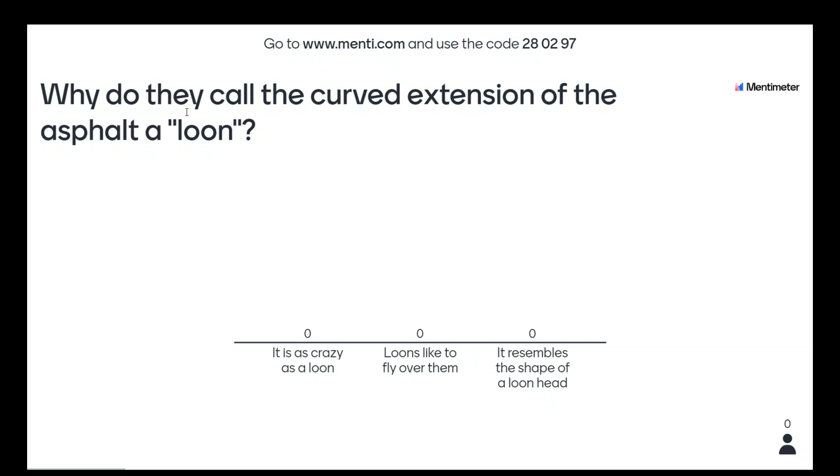Our next project-relevant test question, which you'll understand more later or if you've looked at the documentation we sent out, is why do they call the curved extension of the asphalt a loon? This is where we're dealing with R-cuts or some of the other U-turn engineered intersections.

Unanimously, people said it resembles the shape of a loon's head. I didn't catch anyone saying it's as crazy as a loon, or that loons like to fly over them. All right, I'll jump back to our PowerPoint.

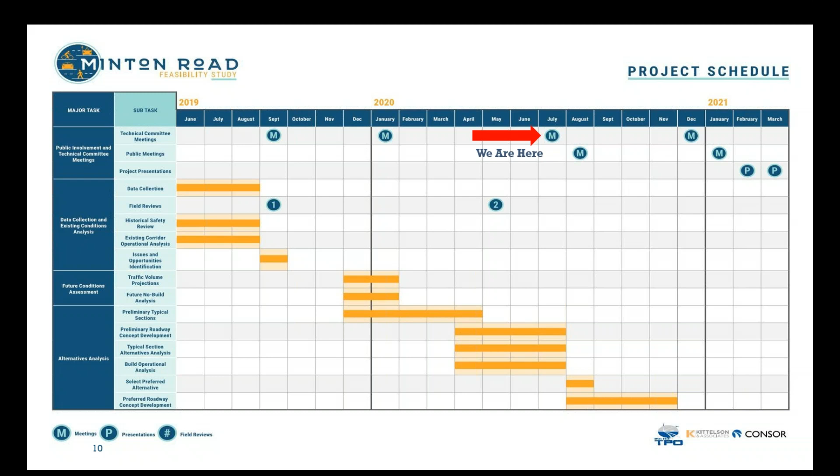So our project schedule - we are here, we're in July, it's our 3rd technical committee meeting. We have one more in December once we get through our preferred concept plan development. Like I mentioned before, we have a public meeting coming up in August, and that's why we wanted to meet with you all now, to make sure we're heading in the right direction before we show anything to the public in about a month.

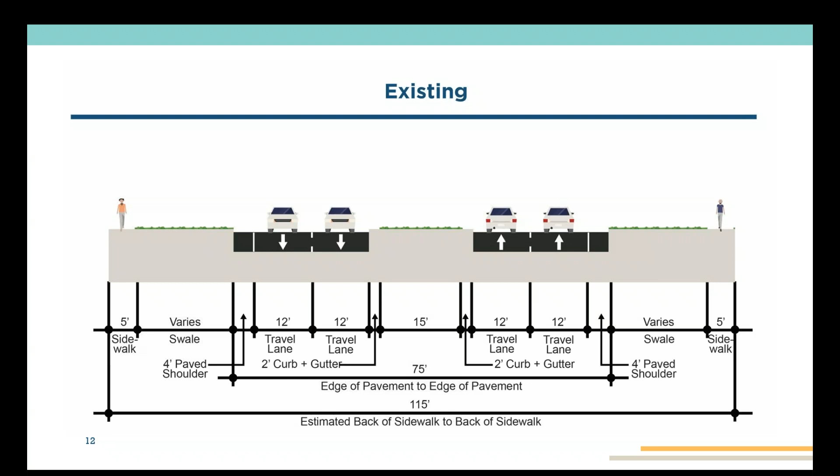So a quick refresher on the typical sections. As everyone knows, we have a 4-lane road with 4 12-foot lanes. We have about a 15 to 20 foot roughly median, and then we have those paved shoulders with the swales and the sidewalks outside of those swales.

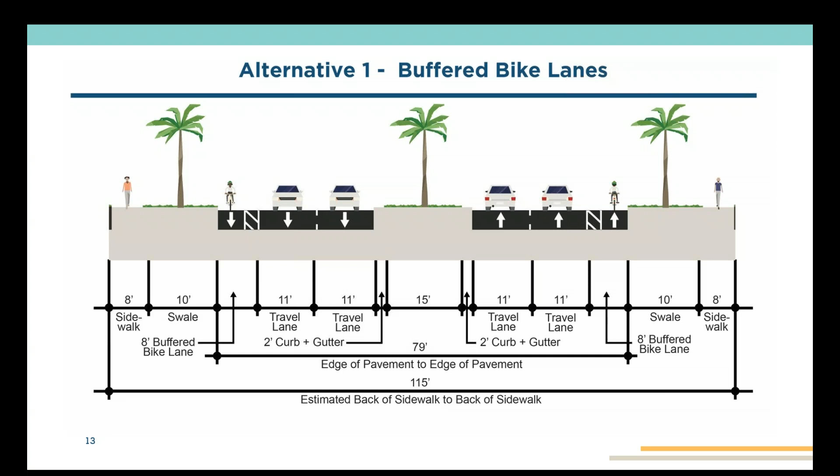So we looked at 4 different alternatives. The buffered bike lanes was our first alternative - it was relatively our least impactful. This involves adding a little bit more to that paved shoulder, adding in that buffered bike lane, and also going to the outside, adding in a little bit wider sidewalks as well.

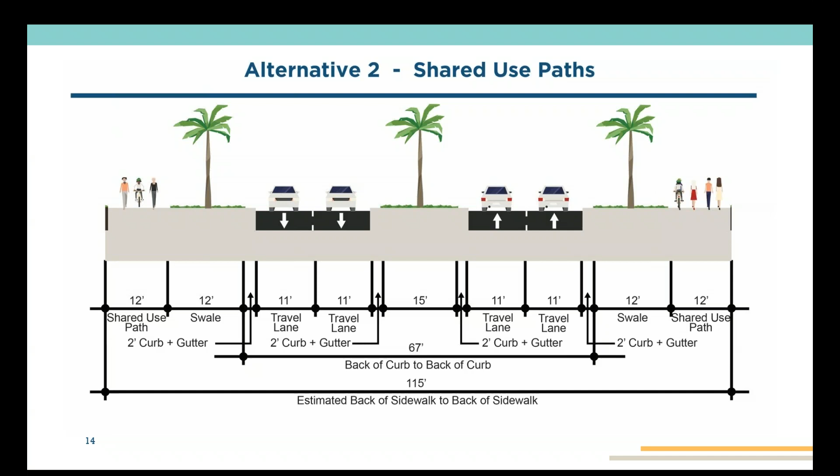Our second alternative, we were looking at shared use paths to the outside, pulling those bicycles off the roadway itself. We know that travel speeds are a little bit higher out there, so some people may not feel comfortable - we want to create a more shared environment outside of the roadway proper, 12 feet wide on both sides for pedestrians and bicyclists. We'd also be looking to reduce the travel lanes and go curb and gutter in this section as part of this alternative.

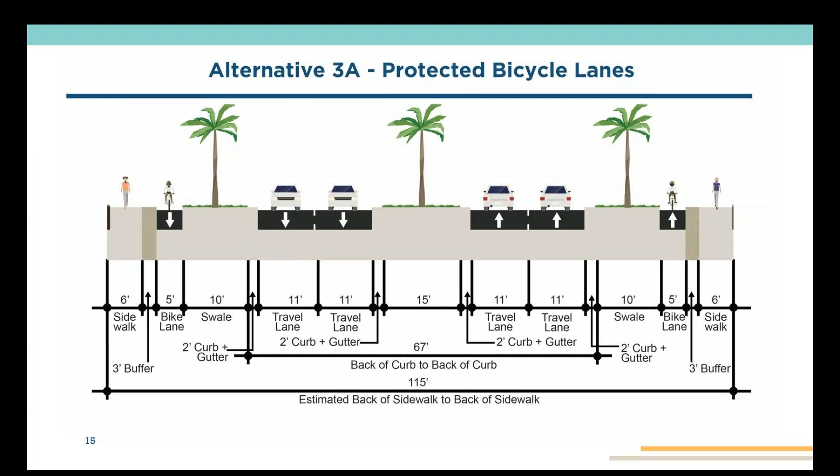So then the last 2 alternatives somewhat piggyback on each other - they're a similar type approach, 3A and 3B. For 3A, we're looking at protected bicycle lanes, and these would be one-way, one direction on each side of the road. If you're going north, you'd be on the right side of the road; south is on the left side of the road in the typical section. We have those 11-foot lanes, and on the outside, those protected bike lanes, which would be separated facilities - separated even from the sidewalk itself. So a little bit of a different concept than the shared use path.

Alternative 3B is a little bit of a different take on the protected bicycle lanes concept, called a cycle track. We showed this example as part of our last meeting, along with some examples of how these have been implemented. Essentially, it's a bi-directional cycle track or bicycle way on the side of the road.

We were looking to put it on either the right side or left side of the road, depending on where we're at along the corridor. We've given thought to putting the cycle track on the west side from Eber to Wingate, then switching to the east side from Wingate to Milwaukee. This hits the different future land uses we see along the corridor, targeting where we have schools, parks, and everything else. In addition to the cycle track, we would also have a wider sidewalk for pedestrians.

So those were the four options we presented. It seemed like we had some buy-in to take these to the public. The big takeaway is that nothing is set in stone. We haven't selected a preferred alternative yet—that won't occur until after our public meeting, and we'll be getting back with you all on that. The other part, and I was talking with David about this a couple weeks ago, is that we can switch some of the elements between these different concepts as well.

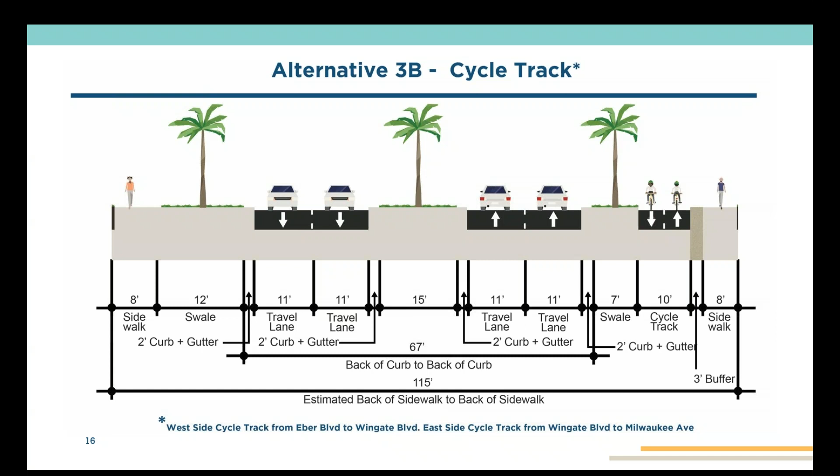Okay, and I think we sort of wanted to understand how that might affect future development with conflicts at driveways. Thank you, appreciate it.

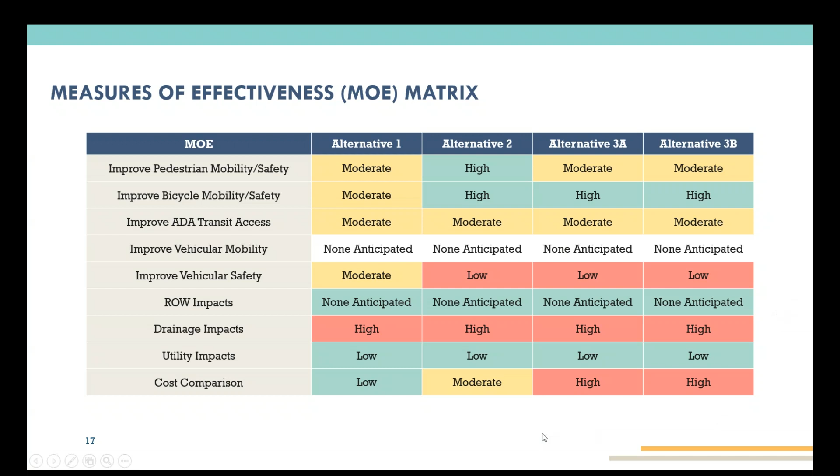Next we're going to get into Intersection Control Evaluation, or ICE, and we'll start with a high-level overview of the ICE process. ICE has multiple stages. What we presented last meeting in January at our technical committee meeting was the results of our Stage 1 analysis. At this point, we've completed Stage 2, and that's what we're going to talk about today.

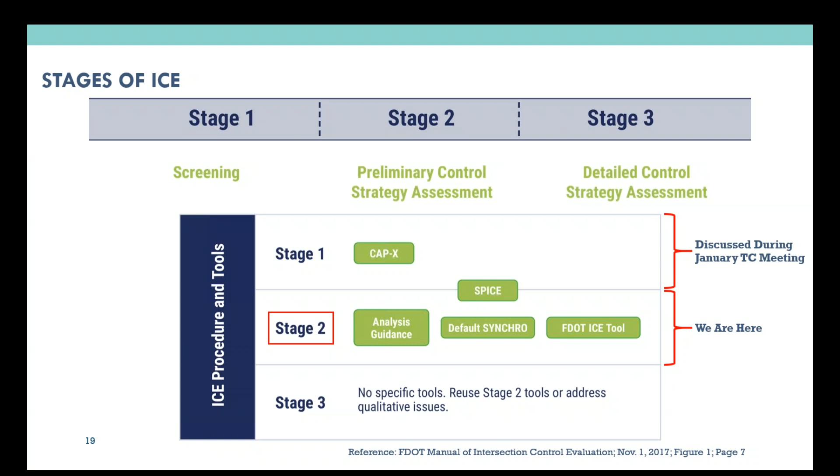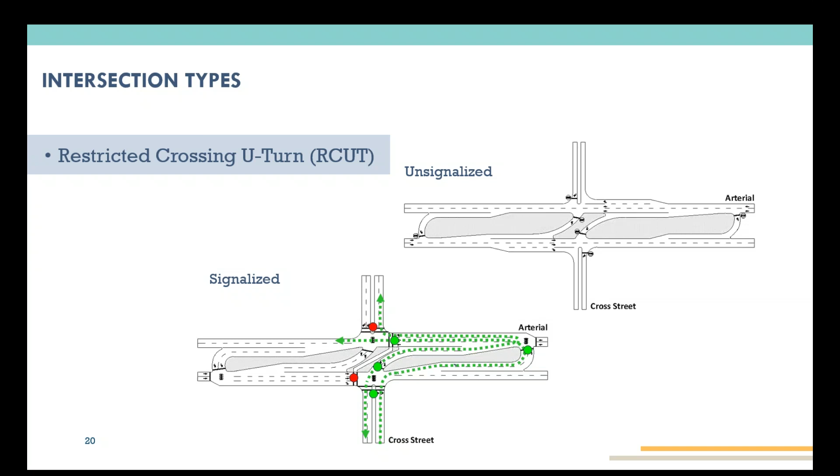First we'll look at some alternative intersection types that we evaluated, starting with the restricted crossing U-turn, or RCUT. The main difference between this intersection and a normal intersection is that through movements and left turn movements are not allowed from the minor streets. These are the rerouted movements: if you're making a left or a through, those vehicles reroute through the U-turns, which on Minton will be located north or south of the main intersection.

The next one we're looking at is the median U-turn. The main difference with this one is that left turns are prohibited on all 4 of the approaches at the main intersection, and again it utilizes U-turns to make those movements through the intersection. So if you're on the main line, and if you're on the side street, you can go through and right only.

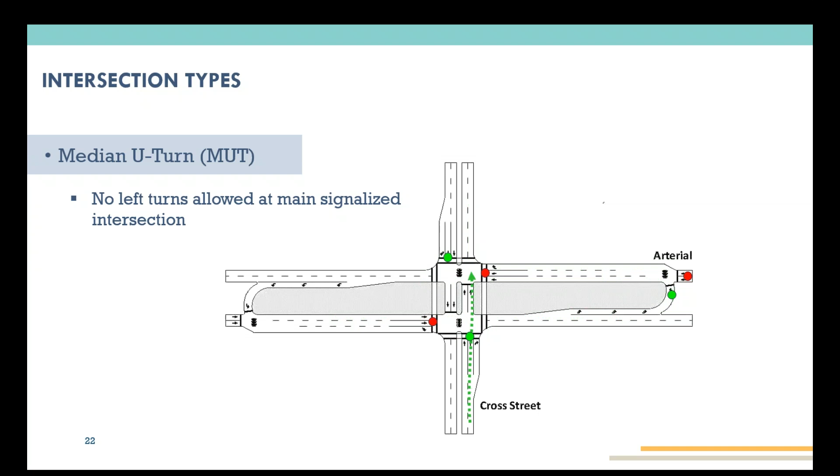A quick refresher of what we talked about last time and our results of Stage 1 ICE. After completing that analysis, the no-build for each intersection has moved on to Stage 2, as well as specific alternatives that were evaluated in Stage 2.

Starting at the southern end of the corridor at Hield Road, along with the no-build, the traffic signal alternative was evaluated, which provided an eastbound left with a shared through-right on the eastbound approach.

At Norfolk, we evaluated an RCUT, a median U-turn, and a partial median U-turn, as well as a traffic signal, and this traffic signal provided dual eastbound lefts with a shared through-right.

At Eber, we looked at two different traffic signal alternatives, one with dual westbound lefts and a shared through-right, and one with a westbound left and a shared left-through-right. Just a heads up, we will go over each of these individually in detail - this is just a higher-level overview of what we looked at.

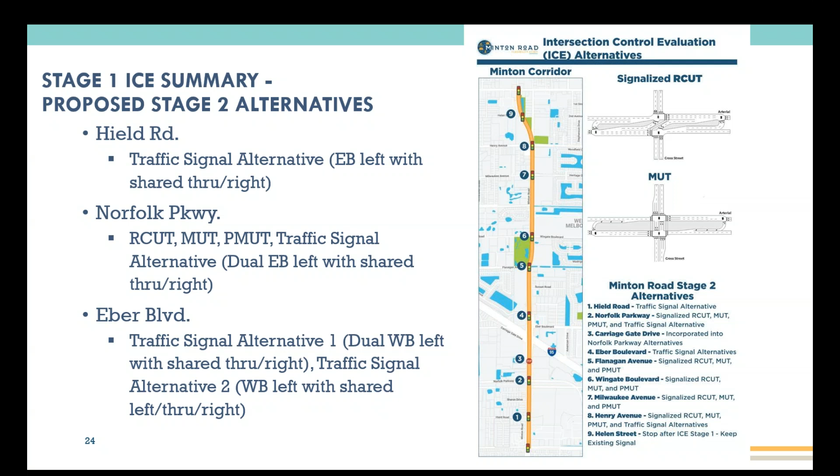At Flanagan Avenue, Wingate Boulevard, and Milwaukee Avenue, we looked at the RCUT, the MUT, and the PMUT at all three of those locations. At Henry Avenue, we looked at the RCUT, the MUT, and the PMUT, as well as two traffic signal alternatives.

One traffic signal alternative with dual westbound left turn lanes with a through and a right, and one with a westbound left and a shared left-through-right.

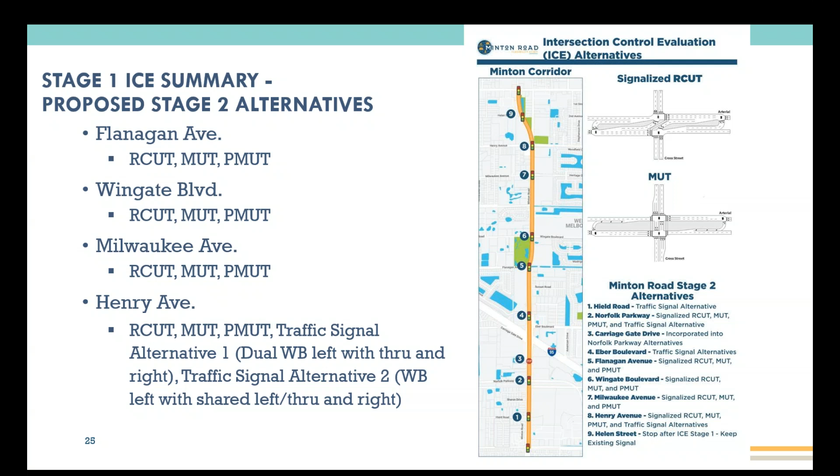Next, we're going to go over a high-level overview of the methodology - what we did in Stage 2. We began by completing an operations analysis using Synchro software. Next, we did a safety analysis using the FDOT SPICE tool. Following that, we developed concepts for our alternatives.

For this, we selected Minton Road and Milwaukee Avenue as a typical location along the corridor, and developed a concept for an RCUT, a MUT, and a PMUT at that location. That concept would then be applied typically at the other locations where we evaluated those alternatives. We also developed a concept for each of the traffic signals that were evaluated.

Following the concept development, we took those concepts and based off of those developed cost estimates. A typical cost estimate was developed for the RCUT, the MUT, and the PMUT, as well as a cost estimate developed for each of the traffic signal alternatives.

The last step was to use the FDOT ICE tool, which basically takes into account all of the analysis that was done - the operations analysis, the safety analysis, the cost estimates - all of that data goes into the ICE tool, and the output is a benefit cost analysis as well as a net present value. These are the numbers we use to compare alternatives to make decisions.

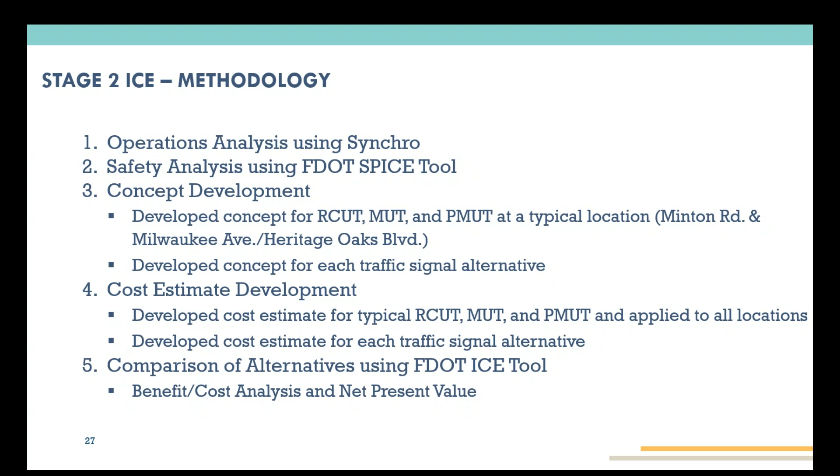So getting into the concepts and what the typical concepts look like. Hopefully each of you guys have these. We're going to go through these starting at figure 1, but if you want to look at it on paper or on your computer screen, that might be easier.

We'll start out with the signalized RCUT. Basically these alternatives allow for signalized pedestrian crossings at the U-turn locations. This is great for locations where you want more pedestrian crossings but may not be able to signalize a certain intersection—this allows you to signalize the U-turn, providing additional pedestrian crossings. As discussed earlier, you can see the loon provided for the southbound U-turn movement.

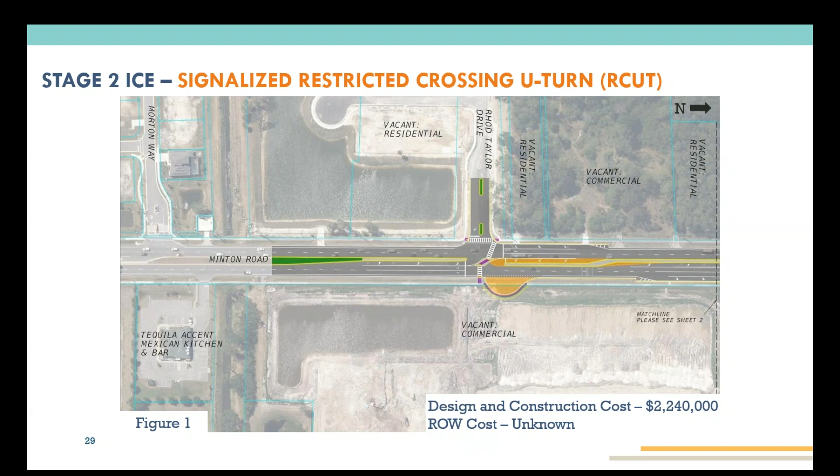Looking at the main intersection for the RCUT, the difference from the other alternatives is that from the side streets, only right turn movements are allowed. Throughs and lefts from the side streets are restricted, and those movements would make a right turn and then U-turn back. There's also a U-turn location on the northern end, with signalized pedestrian crossings. The RCUT came out with a high-level cost estimate of around 2.24 million for design and construction. At this point we don't have costs for right-of-way, as we haven't determined right-of-way costs per square foot yet, but we could look into that in more detail if we choose to go with these.

Next we'll look at the partial median U-turn. Looking at the northern end, this is exactly the same—it provides the signalized pedestrian crossings and has the U-turn with the loon. At the main intersection, the difference here is that the side streets are allowed to make left, through, and right turns, but on the mainline, the north-southbound approach left turns are restricted. The partial median U-turn came out to around 2.23 million for design and construction costs, so right in the same range.

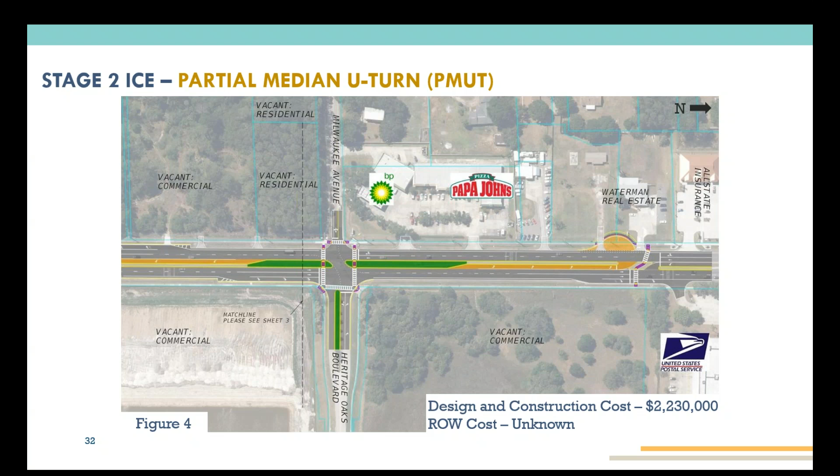The last one is the median U-turn. Again, the northern end is exactly the same, with pedestrian crossings and the U-turn. At the main intersection, this time we're restricting left turns on all four approaches. Throughs and rights are allowed, and you can circle back at the U-turn with left turns being restricted. This also came out to around 2.24 million for design and construction costs, as a rough estimate.

Digging into just the U-turns a little closer, these were developed based on a CAD tool, and we took design vehicles for this location—a box truck and a school bus. The box truck is your typical FedEx, UPS delivery type truck, a single unit 40-foot truck. Our loons were developed based on the right-of-way needed for those vehicles to make the U-turn. In this case, I think the box truck was the controlling vehicle, and that's what the required right-of-way is developed based on in these concepts. As discussed earlier, right-of-way may be needed for these locations where these alternatives are applicable.

And with that, do we have a Mentimeter question for this one?

I'm thinking maybe Sarah, before we jump into Menti, why don't we just go back and open up the floor—any questions about the concepts or kind of what approach we took? Because this is really the foundation for what I'm going to be talking about for the next probably 30 slides.

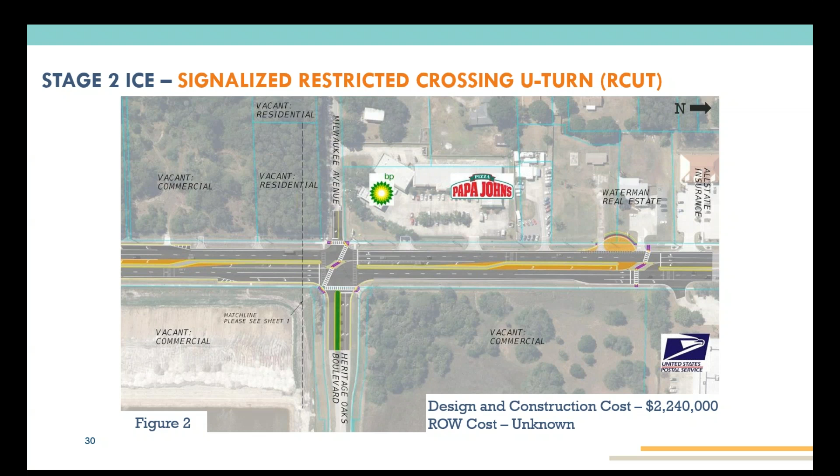Hey, I have a question for you all, this is Christy by the way. I just wanted to make sure I understood, like in this example near the Papa John's and Waterman real estate, that vehicles, when they go into that pocket of that loon, it's not that they're staged there waiting to flow into traffic. That's a complete movement they can do without having to stop, am I correct? Yes, that is correct.

Well, I just wanted to make sure, because I've never seen loons in action. I know how sometimes people pull over the side of the road - is there a chance that could become a broken down car situation where you couldn't do that full movement?

I think that just turns into normal emergency operations. If you have a car break down in the outside travel lane, what we're doing for our typical sections isn't going to prevent that - it's still going to block the outside travel lane. So if a car is disabled and somehow makes it into this loon area, whether you had the loon area or not, that disabled vehicle is still going to be in that situation. Yes, it can happen like you're saying, but I think the odds of that are pretty low, just in general.

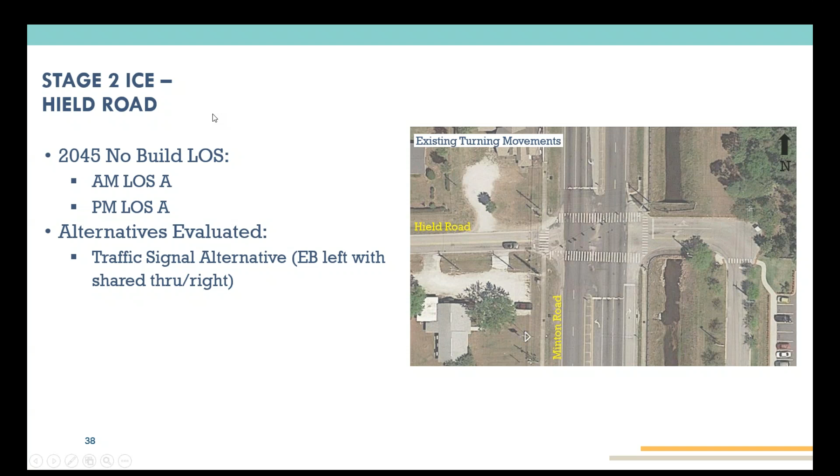So Hield Road, we looked at our initial no build. This intersection is in pretty good shape, level service A in the AM, level service A in the PM. We did get a request from the county after our meeting in January to go back and look at a traffic signal alternative where we looked at adding an eastbound left turn lane. And then it would have an additional shared through right as the right turn lane. So here's what that would look like.

As you'll see, north is up. This is Hield Road, the west leg. We're adding that eastbound left turn lane, then you have that shared through right. As you'll see, we're well within the right of way from what we could tell. You have really minimal impacts overall. You're adding a little bit of pavement to both sides of the road. It's all open drainage today, so it's all just kind of that rural typical section. So we would pretty much just keep that as is. We wouldn't be introducing curb and gutter, wouldn't be doing anything to really change the drainage characteristics of the roadway besides adding that 10 to 12 feet of pavement total, not on both sides, 10 to 12 feet total to add in the extra pavement for that left turn lane. That's all in the existing right of way.

Yes, that is correct, from what we can tell it's all in the existing right of way. And what you'll, I think we talked about this last time, but just to be clear, the property at the northwest corner is actually owned by Brevard County. So if there needed to be some encroachment to the north, it's already county-owned property that would not be an issue there.

All right, awesome. And so overall design and construction, this is really a relatively low cost project. We're looking around $40,000. If you're following along in the packet, this is figure 7. You'll see that on each slide we have in the lower left-hand corner the figure number as well, so that y'all can keep track with us.

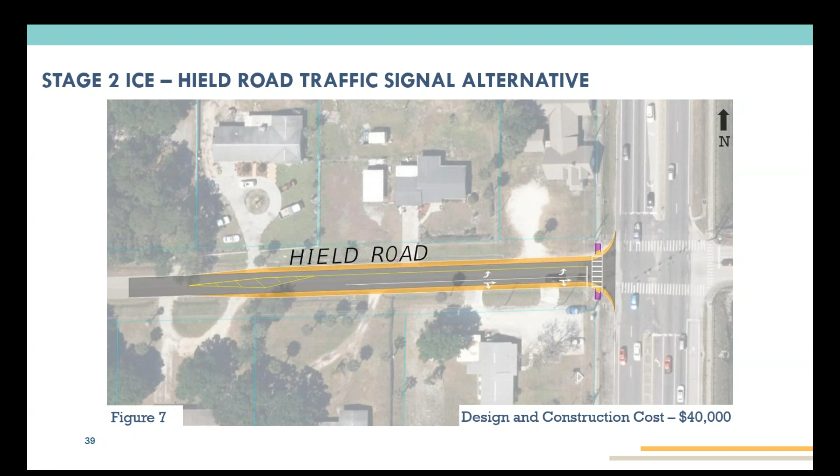All right, so then a very quick summary in kind of the more technical side of things. When we do this ICE analysis, we want to make sure that we're comparing back to our no build. We're calculating a net present value, and then we're calculating benefit cost ratios for a couple different metrics. So what we do is we start off with our level of service. We're saying, okay, we're level service A and B, we're looking pretty good. And the difference here, even though we go to level service B for the traffic signal alternative, that's like 10.1 seconds of delay versus the no build, which is like 9.5 seconds of delay. So it's like right on the threshold between A and B, it's not like you're adding 30 seconds of delay for that alternative. So that's a little bit misleading on that front.

But from a safety perspective, the traffic signal alternative, you're adding that left turn in, you're adding another left turn phase, so you're protecting those left turn lanes for a certain amount of their movements. You get a benefit on the safety there. Like I said, design and construction costs, obviously for the no build it's 0, but we're 40 grand for the traffic signal alternative. Then we move into the outputs of the ICE analysis. The ICE tool that we use, it's an FDOT tool, it runs a program or equation metric thing in the background, and it spits out a bunch of numbers. So one of those numbers is what we call a net present value.

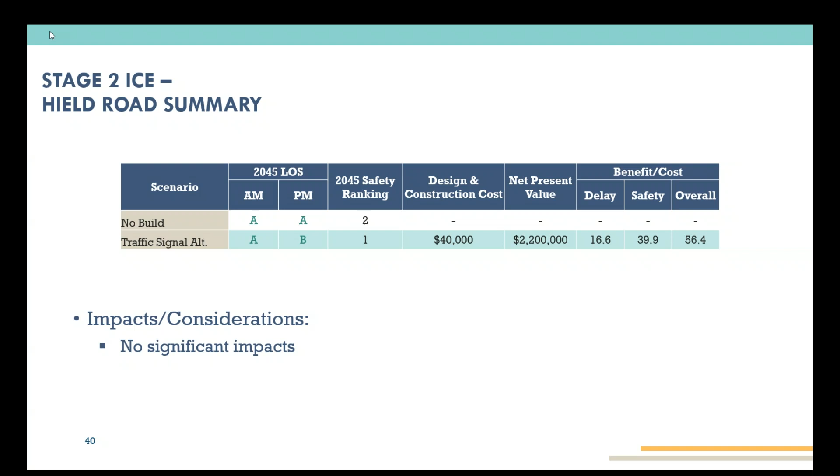All right, so any other thoughts before we go to the Mentimeter poll?

I do have Heald misspelled on this, I apologize. But basically, what should move forward to the public workshop? Actually, I should have included both on here. Do you want to present the traffic signal alternative, or not? So imagine that including the traffic signal alternative means both the no-build and the traffic signal alternative. Do you want to move the traffic signal alternative forward to the public meeting?

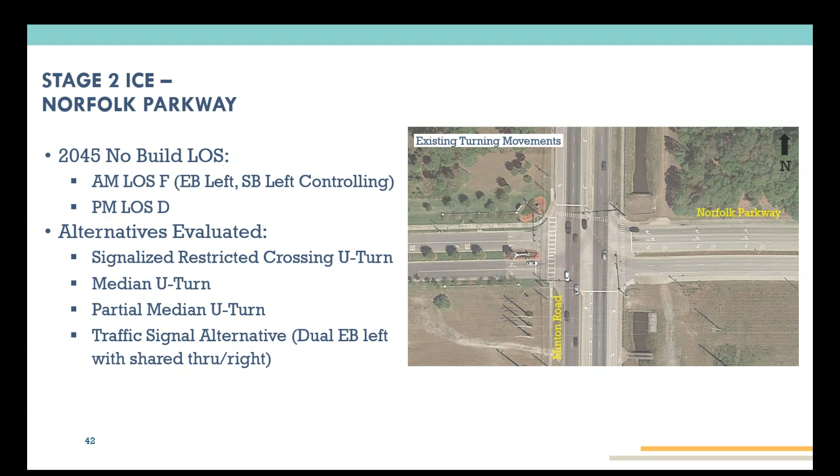So the alternatives we looked at were the R-cut, the median U-turn, the partial median U-turn - we ran all those through our ICE tool. We also looked at a traffic signal alternative, which was dual eastbound lefts with a shared through-right. I will show what that looks like here.

So we wanted folks to really approach this intersection like they would a typical intersection - you approach it in the through lanes, and then the left turn lanes flare out, and you can get into those left turn lanes.

We like that, and I think we talked about this last time, but we moved further. We actually have a signed agreement with a civil engineer to get us the 3 outbound lanes configured just like you have.

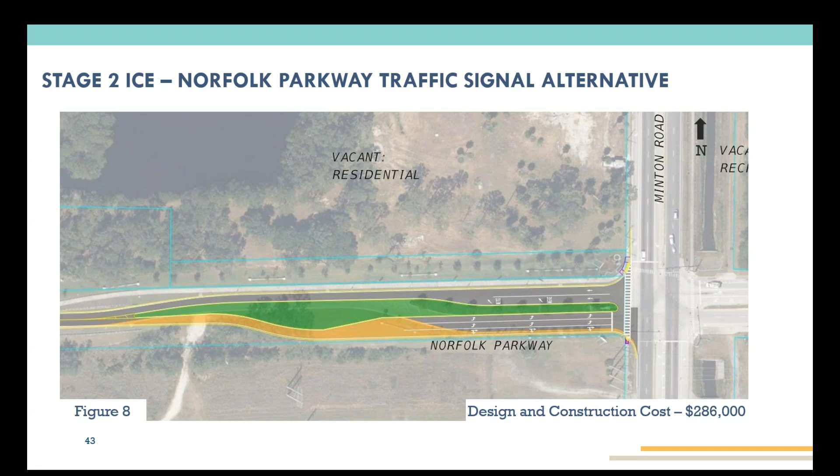Right, okay, all right, awesome. Well, so Scott, to further put your mind at ease, the traffic signal alternative was hands down the best alternative that came out of our ICE analysis. When you're looking at overall construction cost, like Ryan mentioned, we didn't lay out the R-cut, the MUT, and the P-MUT at every intersection. We just used that typical concept to come up with a construction cost.

And so, when we ran those numbers, the other ones just don't quite stack up because of that turning volume that you have coming out of Norfolk.

So, I think with that, one thing we're going to have to think about with this intersection that's kind of an accessory is what do we do at Carriage Gate? Something we discussed in one of our internal meetings was, do you make Carriage Gate a directional, where you make it left in, so you can go northbound and turn left into Carriage Gate, but then Carriage Gate coming out would be a right out only, so they wouldn't be able to make the left across Minton anymore.

Yeah, you're really going to have to talk to the county about that. It affects more of their citizenry. I think the only thing that's in West Melbourne city limits is the church, and that's primarily a Sunday non-peak hour activity, so I don't know that West Melbourne would have a view on that, but the county definitely would.

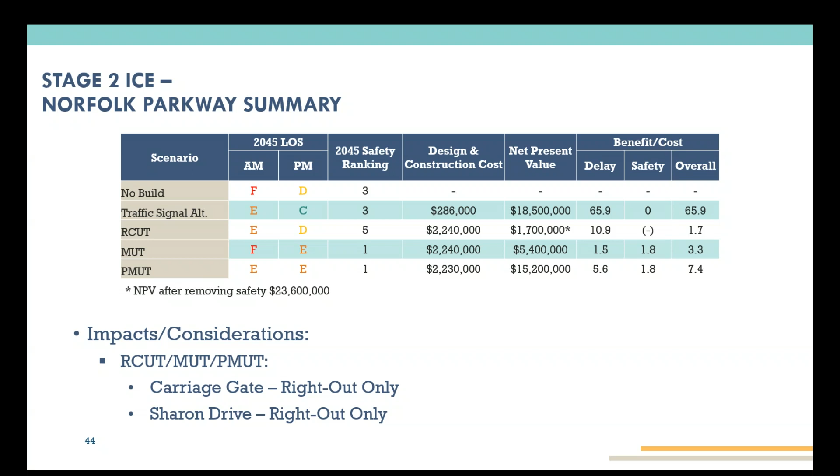Hey, Sarah, did you? Yeah, there we go. All right, cool.

All right, awesome, so it looks like we're all good. So we're going to cut the R-cut, the P-MUT, and the MUT out and just focus on the no-build and the traffic signal alternative for what we're going to present at the public meeting. What we like so far, you're making this easy.

All right, Sarah, do we want to switch back? Perfect.

All right, so moving up across the bridge to Burdock and Eber. So our no-build here, in the morning we were actually pretty good, but in the PM this is where we were having some issues with the westbound lefts coming out. So really what we wanted to do was target that approach and figure out what we could do to make that better. We may or may not have talked about this at our last meeting, but we didn't look at an R-cut, a P-MUT, or a MUT at this intersection just because of the close proximity to the bridge.

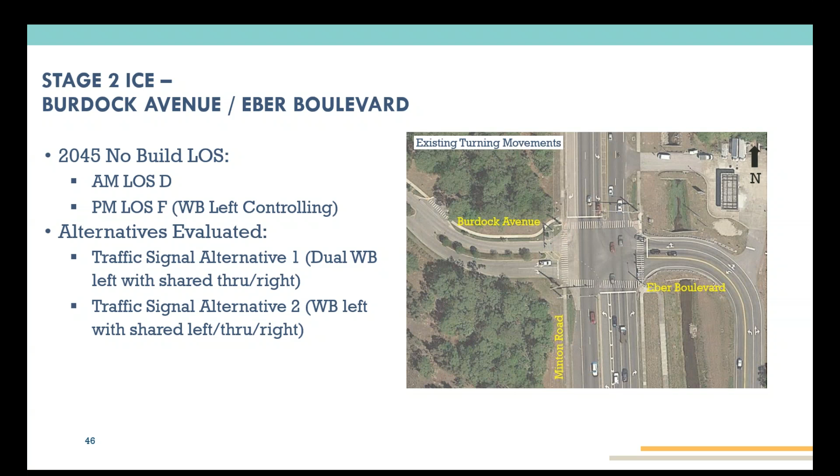So we didn't have enough space to provide that U-turn location going to the south without making folks cross the bridge, and we didn't want to have to make people do that. So we just stuck with the traditional intersection alternatives, of which we had two. The first was dual westbound lefts with a shared through-right, which is just adding another left turn lane approaching the intersection. The second alternative, which we do not have a concept for, is just changing around the striping that's out there today. You'd still have the two approach lanes and the exclusive westbound left, but the outside lane would become a shared left-through-right. I'll talk about some of the issues we had with that approach and concept.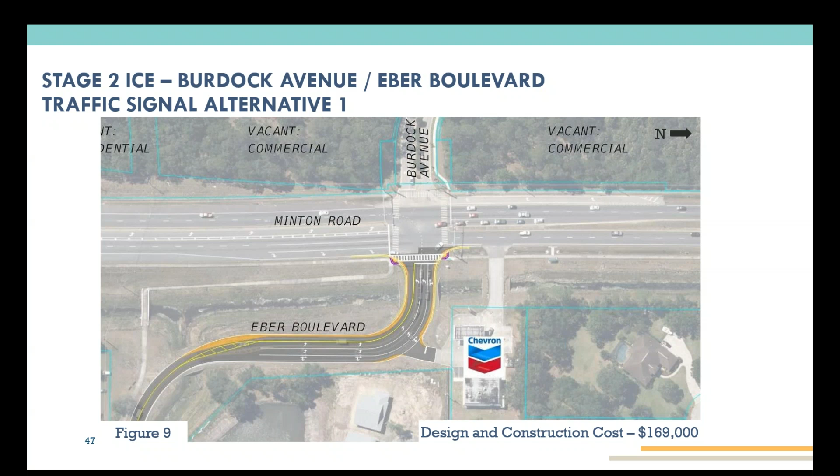Right, okay, yeah, we'll follow up with them on that.

So moving into the analysis, as you'll see, that first traffic signal alternative, which we just talked about, was the better alternative of the two. So benefit cost is pretty high, present value is great, design construction costs relatively low.

The issue with why this second alternative didn't work is when you go exclusive left and then have the shared left through right, you have to split phase the signal, and right now they're running together. So the east and west legs are running together, it's fully permissive, so you can make the lefts, do the throughs, do the rights. You just have to yield to folks.

When you do traffic signal alternative number one, you do go protected lefts for those dual lefts, but then you're still allowing your permissive through movements, and then you still have the permissive left from the west side of the road from Burdock. That still goes all at the same time. So you're limiting the amount of time that Minton has to physically stop and wait for that minor street.

When you go to the second traffic signal alternative, that all just pretty much gets shot because you're having to do now two different phases for those east and west legs. It really kind of blows things up, and I don't think the county's gonna want that, not speaking for them, but knowing their history. So it's definitely a lower cost improvement, but doesn't quite get you what you need, I don't think.

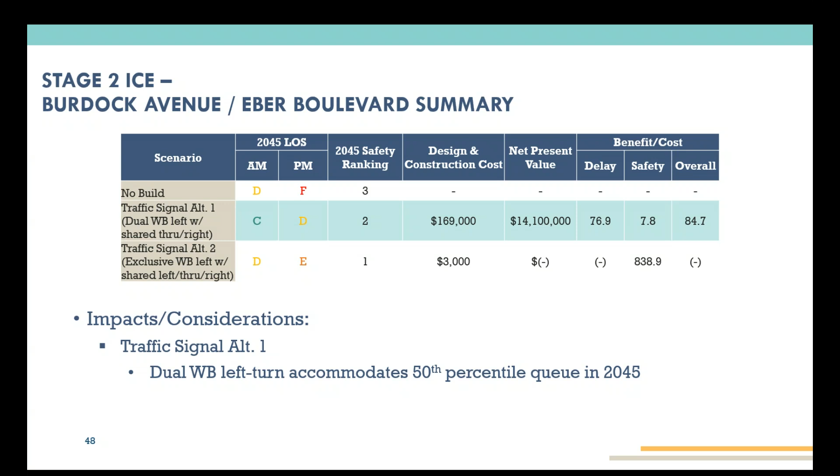Oh, so we both hit the space key. Yep.

So with Eber, are we comfortable only presenting the no build and traffic signal alternative 1, so cutting that 2 at the public workshop?

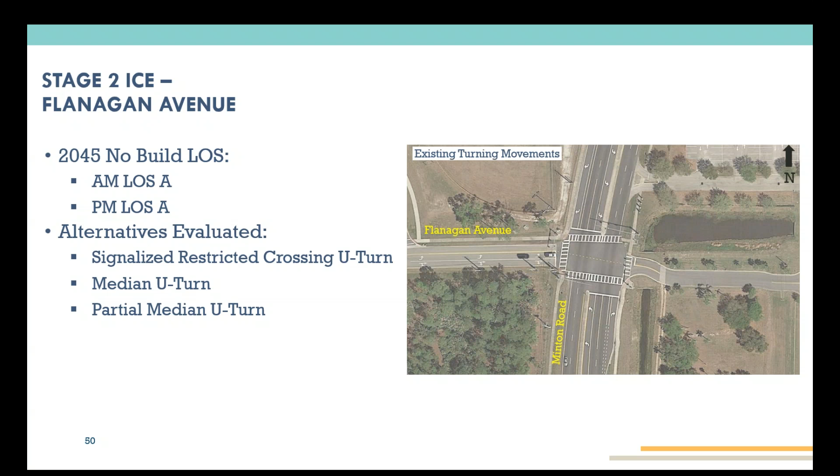And let me do this. What you'll see is that everything comes out negative. So when you're going in and forcing the limited number of vehicles that we have coming up to this intersection on the minor street, we're forcing them to turn right, increase delay, driving along Minton, going down, waiting for the U-turn, and then driving all the way back.

We see that these just aren't really that feasible of an alternative at this location, just because of the low volumes that we have. And so overall, our opinion, we think moving forward with a no build at this location would be the best option.

You know, we don't want to throw an alternative out there and present a bunch of stuff that probably isn't going to get built because it has a high price tag and it doesn't meet the needs of the project. And then also, we look back at the historical crashes as well to see if there was a safety issue, and overall there really wasn't a safety issue.

Sorry, my computer is deciding to freak out and try to install everything all at one time. That's nice.

So overall, it's a relatively low number of crashes, so it wasn't really a high emphasis intersection for us. Anything that we do typical section wise would impact this location from a ped bike standpoint. So we would go back, upgrade the ped bike features, make sure that it all ties together on that front. That's something to consider outside of the intersection analysis proper, is that there would be improvements as a part of the typical section alternative.

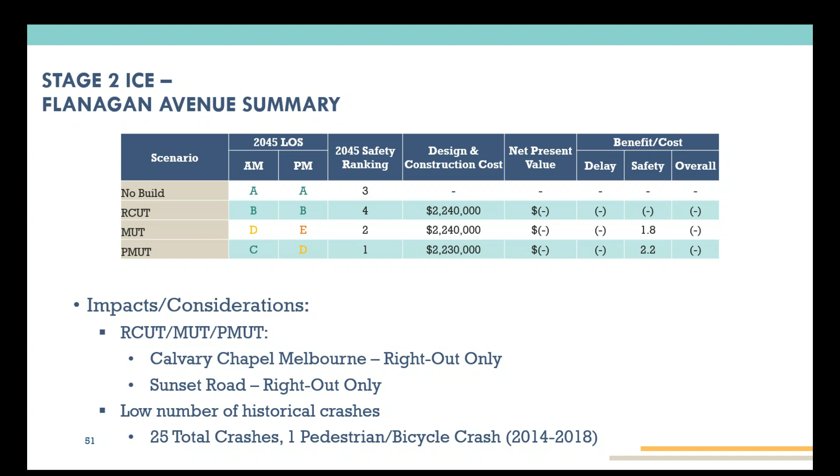All right. Goes back to my motto of if it ain't broke, don't fix it, right? Or I guess that's a lot of people's motto. It's not my motto, but.

All right, so are we comfortable with only presenting the no build at the public workshop? So basically cutting everything, all the analysis showed that really that's where we should go, and just keeping it simple.

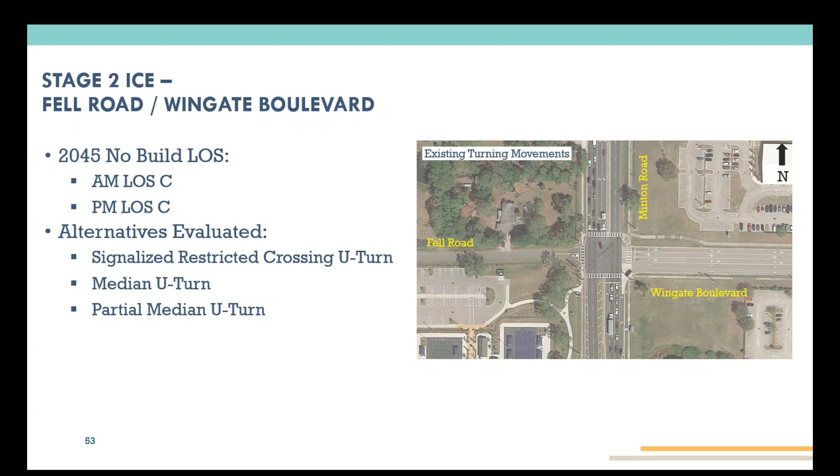We did look at an R-cut, a median U-turn, partial median U-turn at this intersection, and unfortunately none of these alternatives met the needs of the intersection from an ops standpoint. No build operates fairly well; the issues, like I said, we were seeing were during those school times. And what we noticed in the field, especially in the AM peak hour going northbound, a lot of your queuing started at this intersection and trickled southbound, because you have those extra pedestrian phases at that location during school times that really just aren't well factored into operational analyses.

So this is a tough location because I don't think there's a good solution from a kind of alternative intersections or alternative lane configuration standpoint. I'm not sure that throwing an R-cut out there is going to fix all of our problems. I don't think adding turn lanes is going to fix our problems, because I don't think we have a capacity issue at this intersection.

What we're going to propose as part of this is, instead of looking at alternative intersections, when we get into our preferred typical section, we're going to place an emphasis at this specific location to tie in all of those ped and bike features. We'll make this a pedestrian and bicycle safety emphasis intersection by tightening up the curb return radii on the corners, making sure all of our crossing distances are as short as possible, adding signage to further enforce that drivers have to stop on red and yield to pedestrians, really trying to emphasize that ped and bike safety.

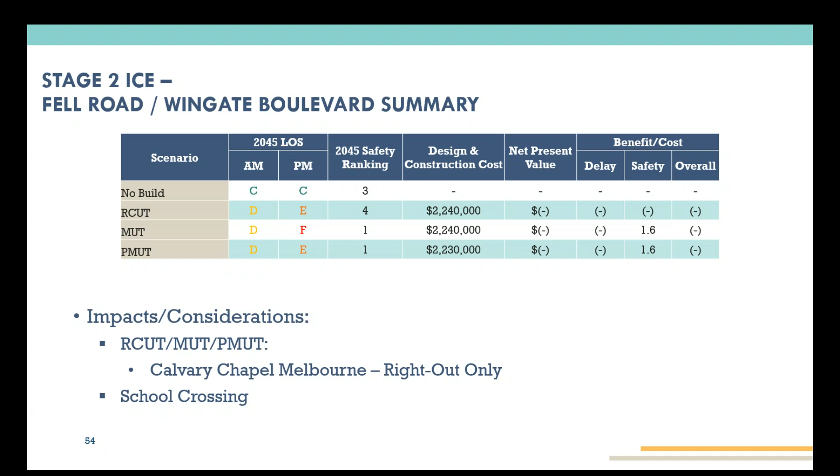So with Wingate, are we comfortable only presenting the no build at the public workshop? So not moving any of the alternative intersections forward, with the understanding that when we get into the nitty gritty after the public meeting, that it would be an enhanced no build. That sort of would be my answer, neither yes nor no, but is there any way of having, even on a couple of slides, an enhanced no build, so it's no build and enhanced no build with some at least general descriptor, including a recommendation for the study. That way it's, whatever can be done between now and then, but at least not saying that we're not going to do anything here or have people maybe perceive that we're not doing anything here.

Yeah, so the plan, Scott, for the public meeting is we're not going to present the no build. We're going to present that kind of enhanced no build, and it won't be a concept. It'll just be like what you're saying — a board with here's the intersection, here are some of the issues that we saw, and then here's some of the solutions that we think we're gonna flesh out as part of the project. It'll be enhanced signage, better striping, maybe bringing those curb returns closer, shortening the curb return radii, so we're making people make sharper turns, which hopefully slows people down, things like that. So the label on that probably becomes important.

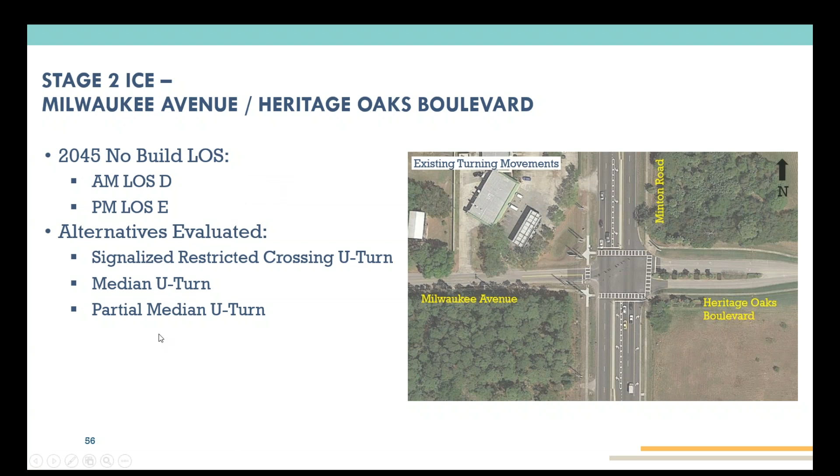So same thing, we looked at the R-cut, median U-turn, and the P-MUT. Actually, Travis, can you just hold on one second?

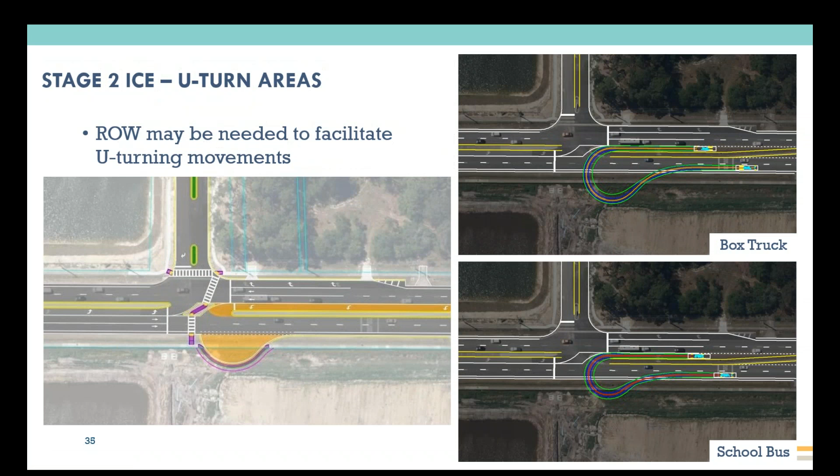Let me go back to the R-cut concept here. Sorry, it'll make a lot more sense. There you go, yep, there we go. So, this is the P-MUT, but it's the same concept. So this U-turn location here, we're kind of straddling the line between these two parcels. What you could do is bring this U-turn back so that your loon is kind of in this area here, one parcel.

Okay, so let me interject and tell you that's going to be a floor shop design of the Times, and they're going to be doing some lift station stuff with a private lift station though.

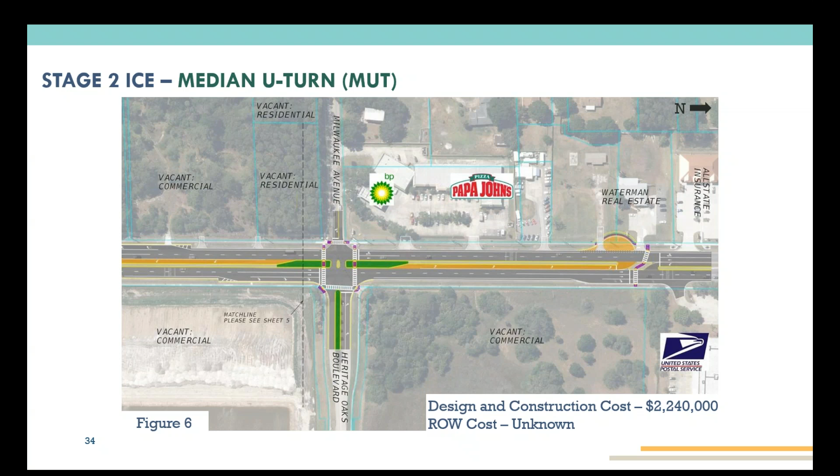Christy: Well, the building department was just waiting on them finishing their building permit stuff, but they're very close. But all the planning approvals are done. Yeah.

Well, okay, the Google map shows it for sale, so I was all excited. I had mentioned that actually internally. Well, and I guess, Buddy, I'm sorry, I didn't realize that conversation happened. Yeah, I had that conversation last week.

Well, as Travis said, where the U-turns are established can be tweaked within a range. Sure, well, it's just easier to acquire one property than two. It's easier to acquire an undeveloped or redeveloping property than an existing one.

But I think for concept purposes, given that the south one's not that difficult, probably because there are no plans for that commercial yet. This one's the tougher of the two. Yeah.

Well, and this is, you know, the other kind of policy decision is, do you forego the U-turn going northbound and just make folks go U-turn at Henry? What does that do to that? Anything? Because I don't know how many movements we're talking about here.

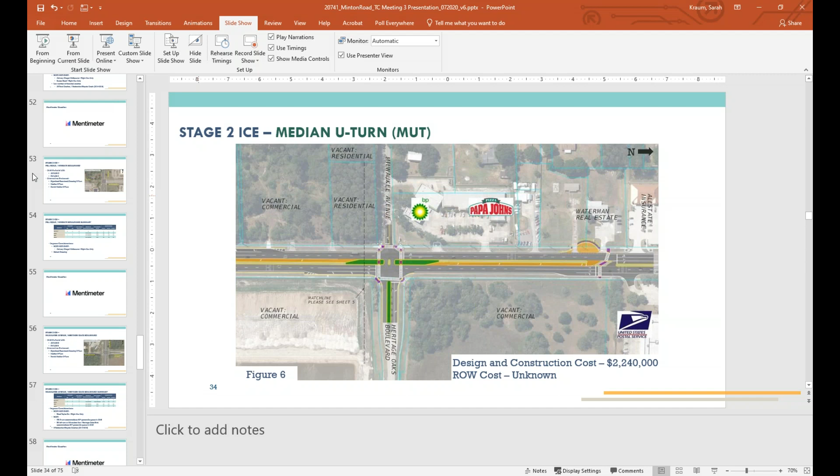All right, well here, Travis, I tried to queue you back up instead of flipping back through. Yeah, I think we're good. So the summary of the discussion is the northbound U-turn location - we're gonna have to take a closer look at that to see exactly where it gets placed. Christy and Scott, from your perspectives, if we moved it a little bit further south and did it all in that one parcel, is that a complete no-go, or would that be a better alternative than what we're showing right now?

I think that's better - my point was simply because you'd be dealing with one rather than two. Right now you're dealing with two. By the time this would get there, if that were the choice made, you'd be dealing with two people's parking lots plus whatever utilities.

Yeah, but my point was about the cost. You have a newly developed parcel - let's say it develops in the next 2 years, and this isn't really ready for prime time until time after that. It just seems there's going to be higher valuations on all that pavement, and like I said, private lift station and utilities and whatnot from the design of the Times, than from that shared Waterman real estate and design of the Times kind of impact.

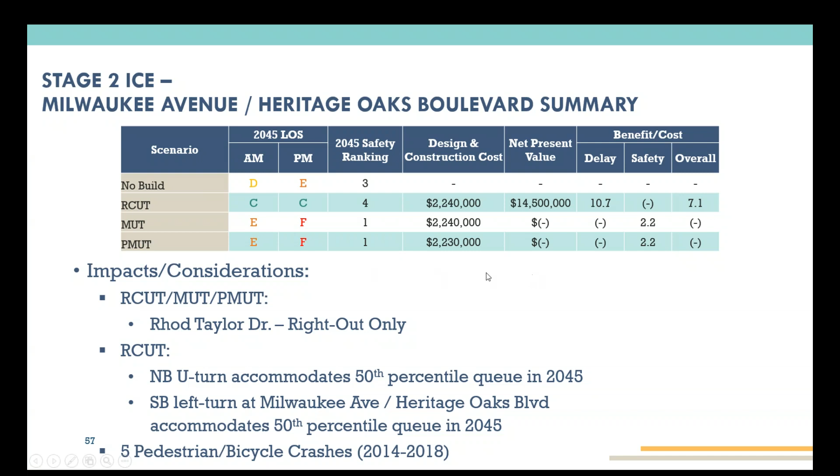Well, Scott, I think you kind of teed us up for our next one. There you go. All right. Oh, hope I am unmuted. Oh, hold on. Yeah, you're good.

All right, Milwaukee, are we comfortable only presenting the no build and R-cut at the public workshop? We feel like we should still present the R-cut at the public workshop, even if it turns out we can't really move anywhere with it after that.

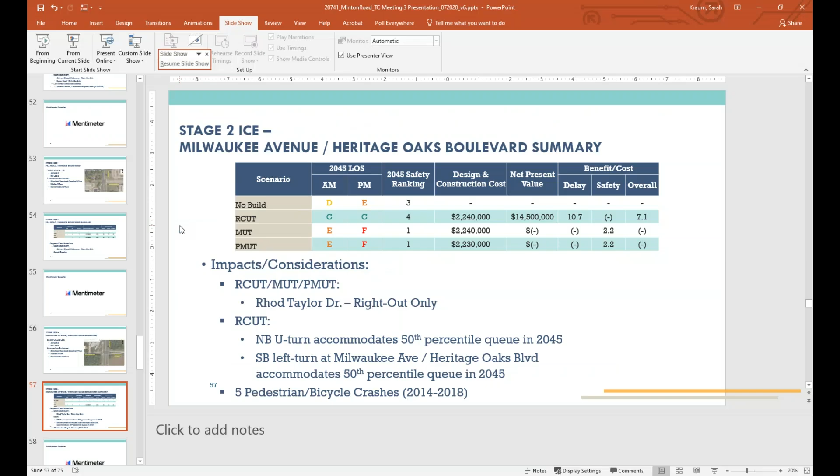All right, and I have yeses in the chat box, so I'd say we're good. And let me turn it back over. Oh, I don't know why I'm now on 2 different ones.

Turn it back over to you for our last one this time. All right, finally, we've made it all this way. All right, up at Henry. So this one's a fun one, saved one of the best ones for last. So we looked at a couple different things, obviously the R-cut, MUT, PMUT, and then we looked at a couple different traffic signal alternatives as well.

So one of those was the dual westbound left with the through and the right, so you'd have a 4-lane approach coming westbound approaching the intersection. And then we had another traffic signal alternative, which we came up with from Sarah's idea after our meeting back in January. It was to limit the amount of impacts we had along Henry, especially when looking at our access management for the USPS.

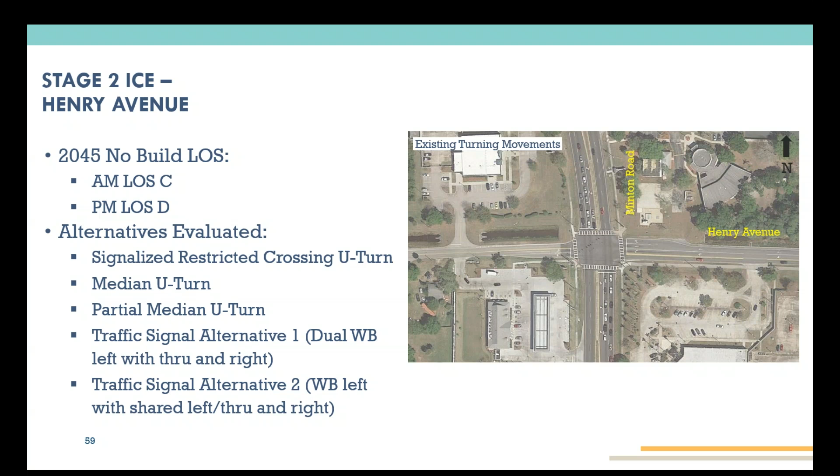And looking at doing a westbound left with a shared left through, so the middle lane would be a shared left through, and then you would have your exclusive right turn lane on the outside. So, let me go back to here.

And so what we want to do is show what the alternatives would look like. So our first one, this was alternative number 1. We're adding those dual westbound left turn lanes, then you have your single through lane and then your right turn lane to the outside. As you'll see, all the orange is new pavement.

So we're adding that, pushing that to the south. Looks like we're staying within the right-of-way line, which is nice. We're still able to get that much lane in right-of-way. From what we're seeing, the blue is our right-of-way line here, and we even have a little bit to spare as well, even with the sign.

What's the source of the right of way? You can see the sign for the post office in the corner, right? The little monument sign.

It's sort of visible in the overhead. I mean, if that's really true, that's really great. Having that much room without having to get into the box on the north side or being on the post office property on the south side.

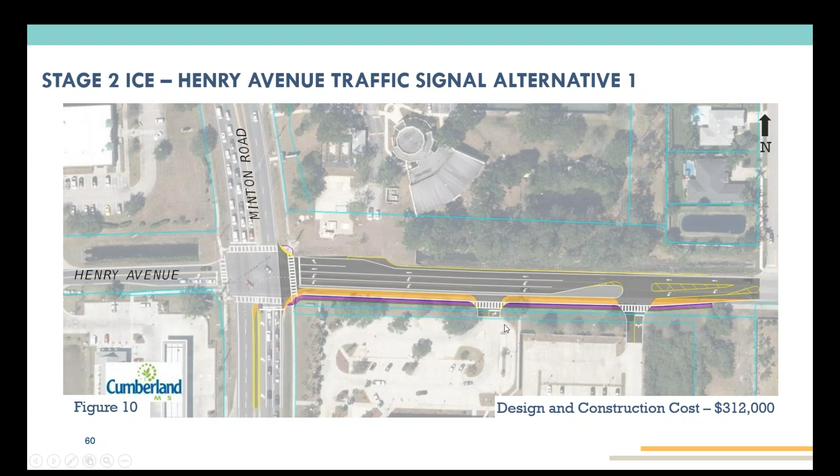So what does this look like from an impact standpoint? If we're trying to enter that driveway, the left side is existing, the right side would be proposed. What you'll see is the only movement that's impacted is movement number 1, this left turn in - so you won't be able to make the left turn in anymore. You would have to essentially circle the block, come down, and make a left turn down at this driveway here. And how this plays a factor is with the R-cut recommendation from Milwaukee - so we're a little bit north of that U-turn location here.

So what we could do is add a secondary left turn in here. This would essentially become a signalized directional median opening. So you'd have your northbound U-turns from Milwaukee, and then you'd be able to facilitate those left turns in for people that need to use the post office as well. You could bring it all under signal control and really clean that area up.

Then the Henry access becomes way less important. Right, exactly. That's how you alleviate the entering. How you alleviate the exiting is a little bit more cumbersome for folks, but not too bad, I don't think.

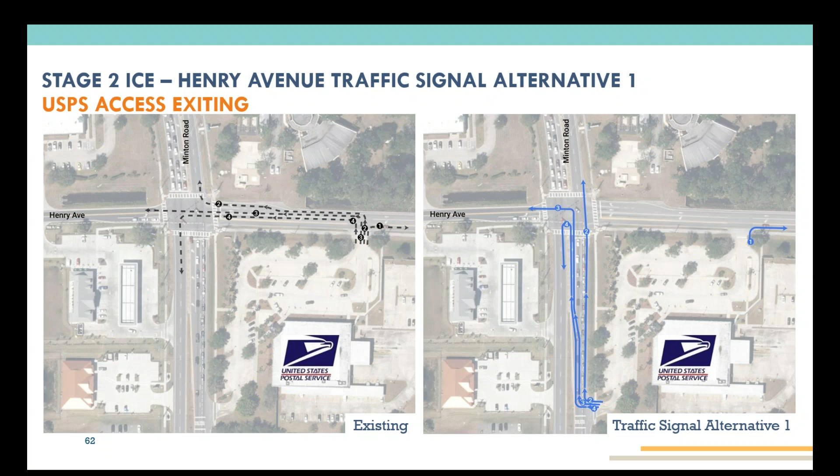So these are just a few things that, if we decide to take this to the public as an alternative, we could show with graphics that we're thinking about the impacts to the site itself.

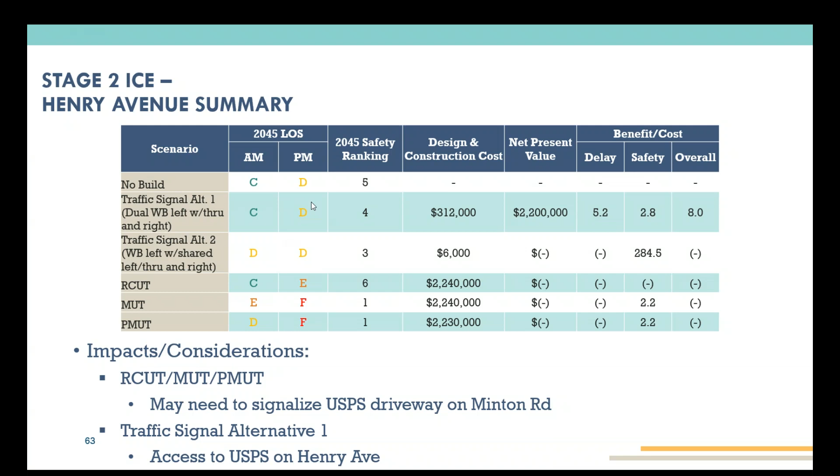Are we comfortable only presenting the no-build and the traffic signal alternative 1 at the public workshop, dropping Alt 2 off the table, and keeping Alt 1, even considering that we might end up with right-of-way constraints we don't know about yet?

I know we've lost a couple people, so that might be it on our voting. All right.